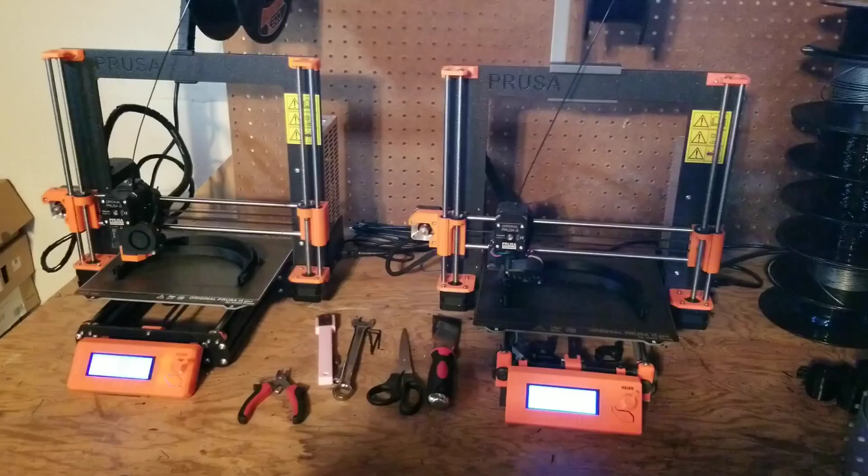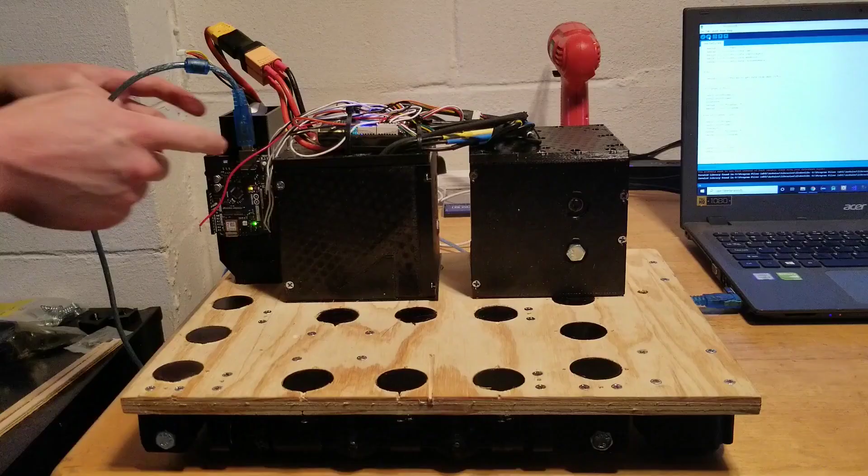Hi there. This video is part of a build log series. I'm building motorized shoes that you'll wear while you play a virtual reality game that keep you in the same spot as you walk, like a treadmill, allowing you to walk infinitely in the game. For now, I call them VR shoes, or Omni shoes. This will be a short update.

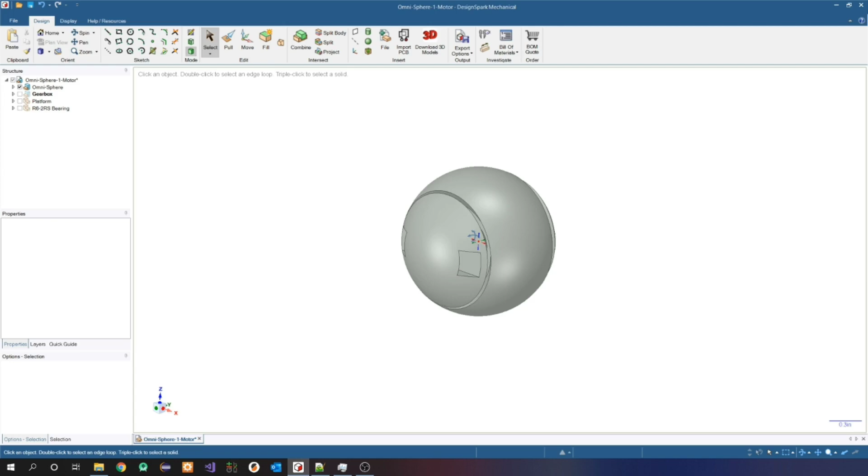In the past video, I showed you the successes of my design and went over the problems it still has and some of my ideas for solutions. That was 2 weeks ago, and since then I've been brainstorming and designing and rethinking every aspect of the design so that I can make it simpler and more functional. I've thought about all the lessons I've learned from all my other designs. I've spoken about these lessons at one point or another in this series.

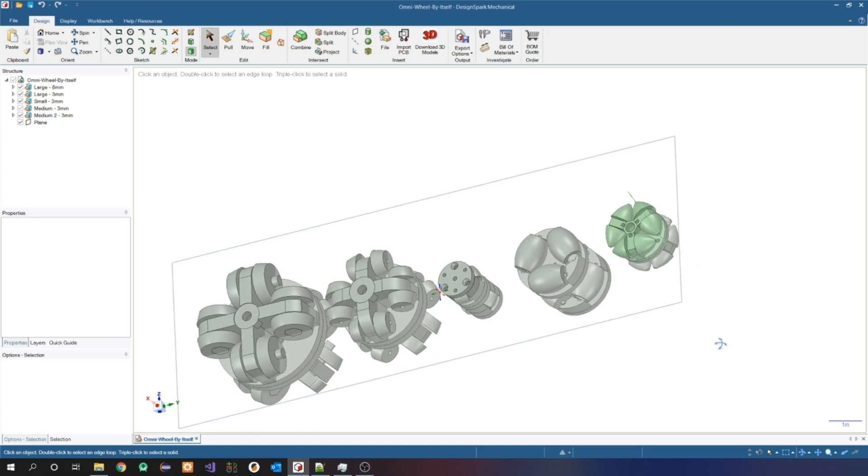One of the things I've been reconsidering are omni-wheels. They didn't work the last time I tried them out, and I'll leave a link to an article in the description of this video where I go over the issues I had. But if I could get omni-wheels to work, the design could be much simpler than with omni-spheres. After some research, brainstorming, and discussion on the Discord, I think I have a design that'll work. I'm going to try it, and if it doesn't work, I can always go back to omni-spheres.

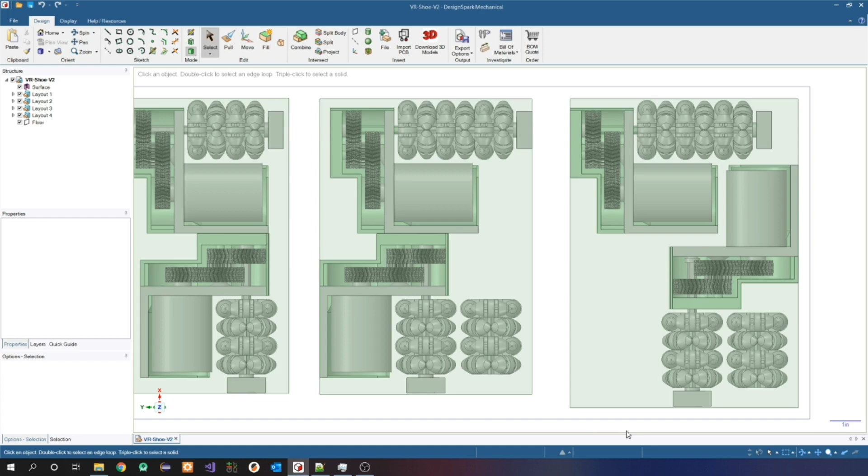After modeling out several different ideas for designs that are both simple and solve the issues I run into, I've created this new design for the next version of the VR shoe. It's simpler, slimmer, doesn't use chain or belts, and distributes the user's load in a way that should work. I've started printing the parts for the new design. I'll share the build process and testing with you guys as soon as I can.

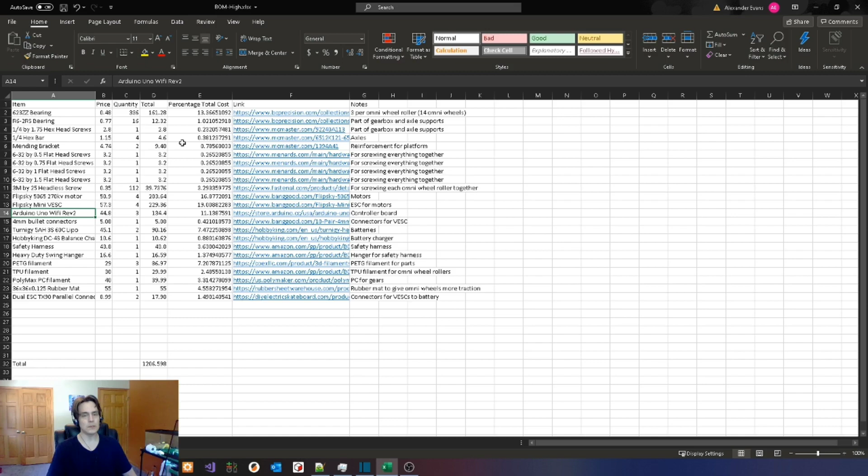And some of them are more convenient, like the Arduino Uno Wi-Fi Rev 2. It's an Arduino, and it has Wi-Fi built in and an accelerometer built in. It's just a little bit more convenient. And then some of these components I'm also choosing to not buy from China, even though I could buy them from China for way cheaper. But after I get a working version of the shoe, I'll start swapping these components out for their cheaper alternatives, and hopefully be able to drive the cost down to $500 or less.